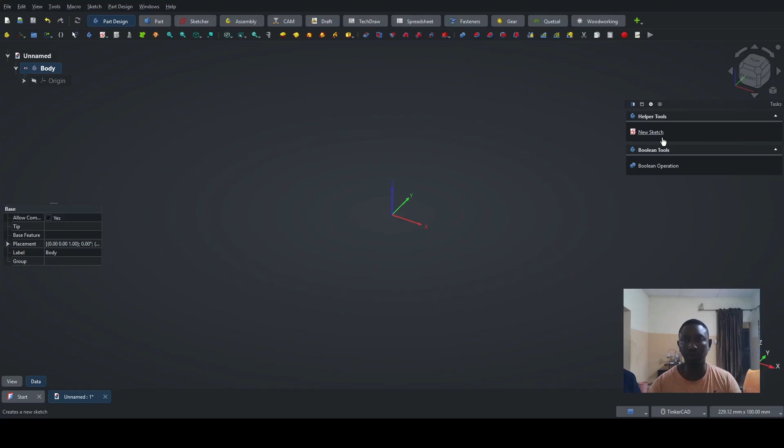So you create your sketch. We are going to use the XY plane, and then draw our basic rectangle. This time around, let's go to the rectangle tool, use your centered rectangle, click on that, come to the origin. Let's put in our basic dimensions, which we can always adjust later on.

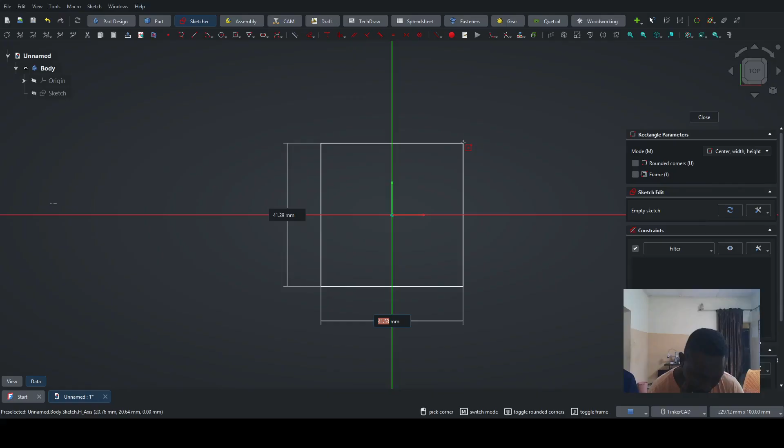But I think let's do it this way. Let's first of all draw the basic rectangle and leave it like that. We'll put dimensions later on.

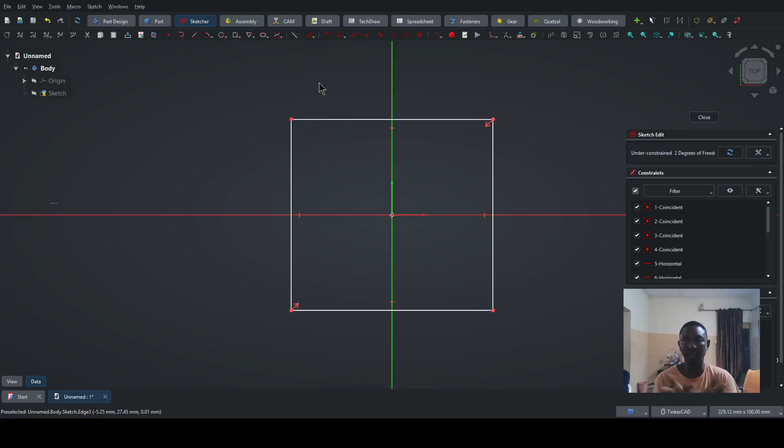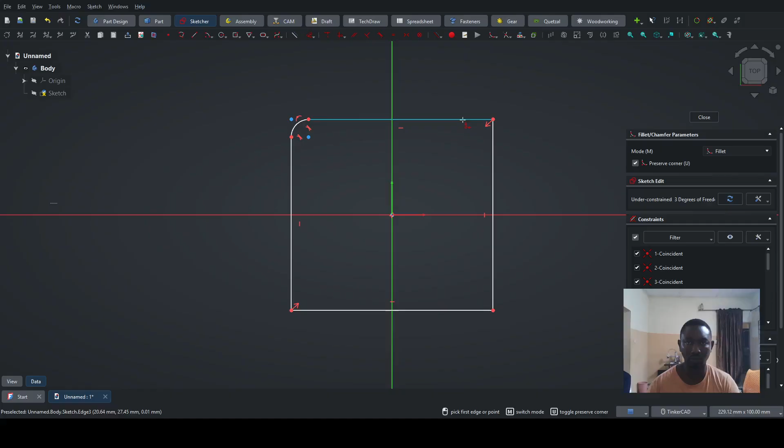Now I want to teach you how to form curves, fillets, or arcs around your basic drawing. So I can select this line and go and do this. You see, this is called the sketch fillet tool. So if I click on this, I can do this, and do this, I can do this.

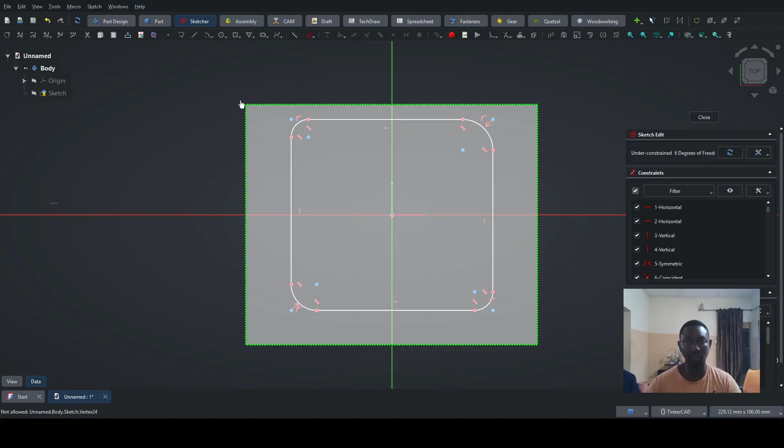But someone who is perceptive would already know there seems to be an easier way to go about this, which is to use what? So I can select everything like this and press delete, and then come to the rectangle tool and click on rounded rectangle, and then draw my rectangle. You see, it's already rounded from the beginning.

So I've created a rounded rectangle. I can just say I want this and this to be symmetric across this. Let's keep that for now until we dimension them. So I've used the rounded rectangle tool.

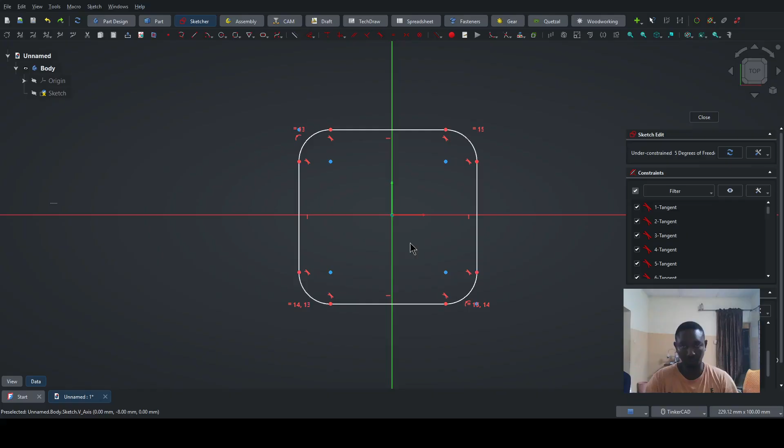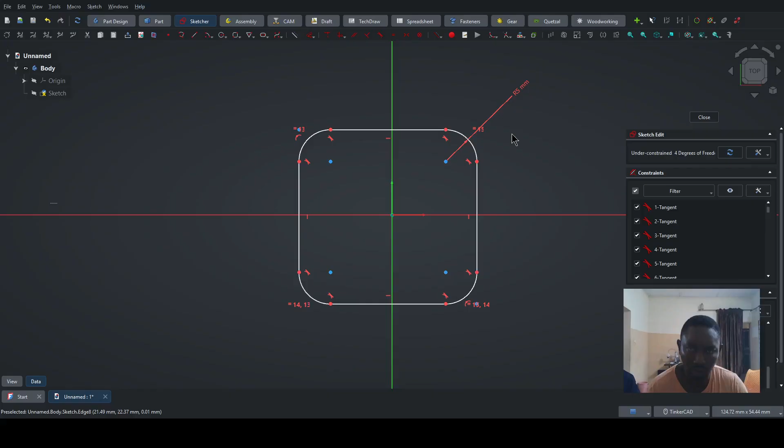5. So since they are all equal, we can just take one of it, press letter D, and press 5, so we'll make the radius 5. Also, we can now dimension between this point and this point and press dimension D.

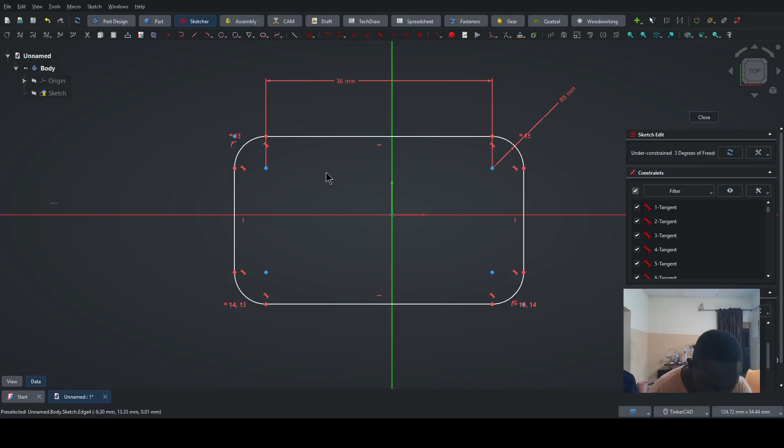In the drawing, it says it is what? 36. And I believe this is a square, so this and this should be what? If this is a square or a square-ish shape, then this line and this line ought to be equal.

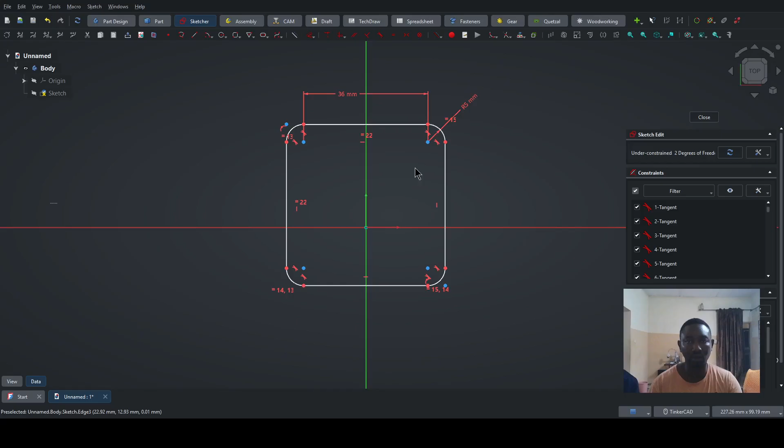I press letter E, and then they are equal. And then we want this diagram to be in the middle of the sketch axis here. So I can select this, select this, select this line, select this, and press letter S.

This is not doing what I want, so let's just do the traditional ones. Let's select this point, let's select this point, and let's select this line, and make it symmetric. And then let's select this point, select this line, and select this point, and make it symmetric.

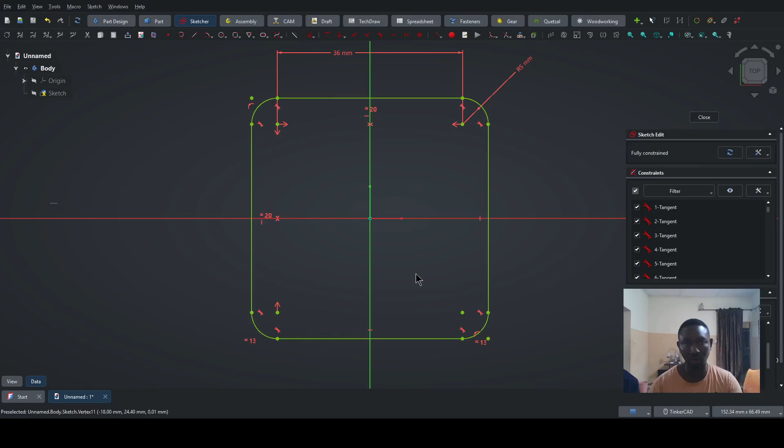So you can see that's symmetric already. FreeCAD can be funny sometimes. So we have our basic drawing, the shell. Let's go on to draw other parts of it.

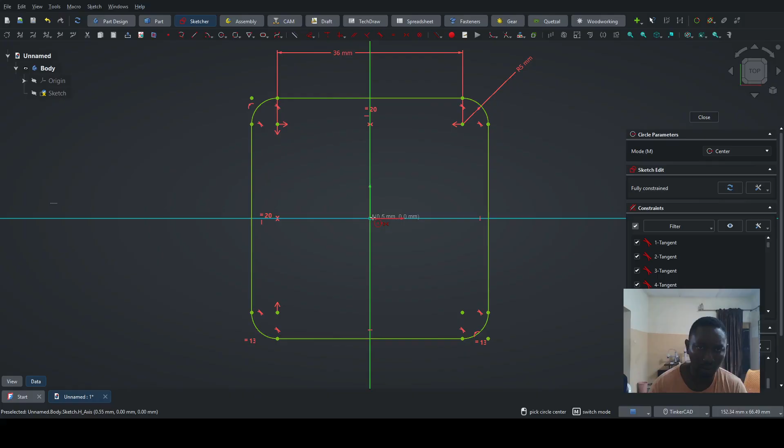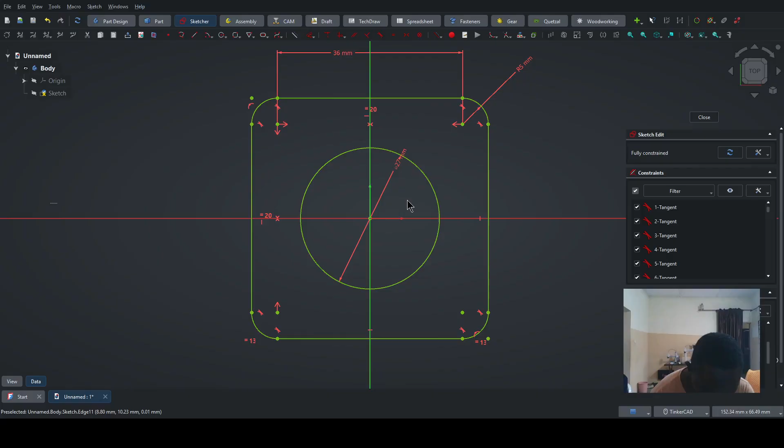And then we have these small ones at the edges, which are 6 each. So I click on this, come here, this dot, and give it a dimension. The dimension is 6, you see?

So I can do an arc, I can decide to just go and start drawing the circles on each of these edges, do you understand? Or I can click on the circle, click on this line, and go to the symmetry tool, which should be called the mirror tool. So on some versions it's called the symmetry tool, but it's the mirror tool now in the newer versions.

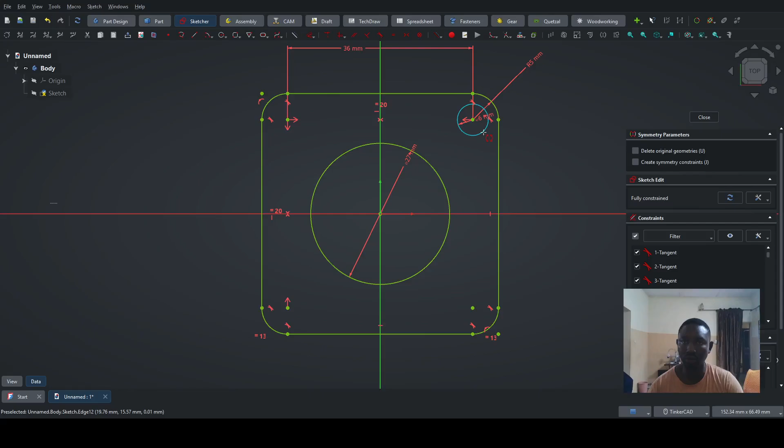So I click on this, click on mirror tool, and I mirror it across this. The only problem is, you see, it is not green because it's not totally coincident. So I can just click on this and this and make it coincident.

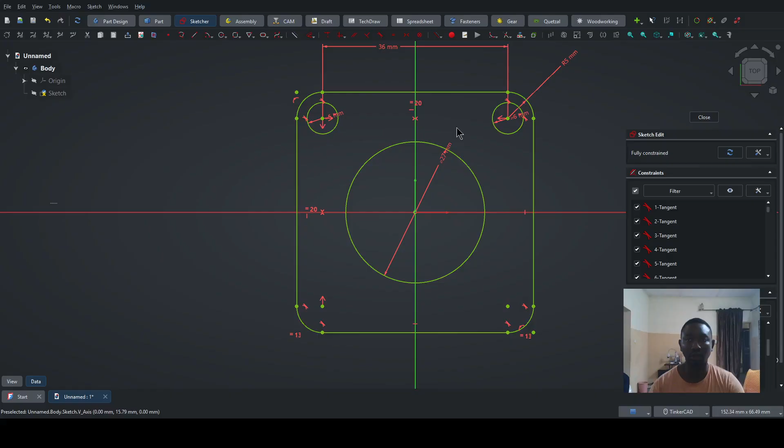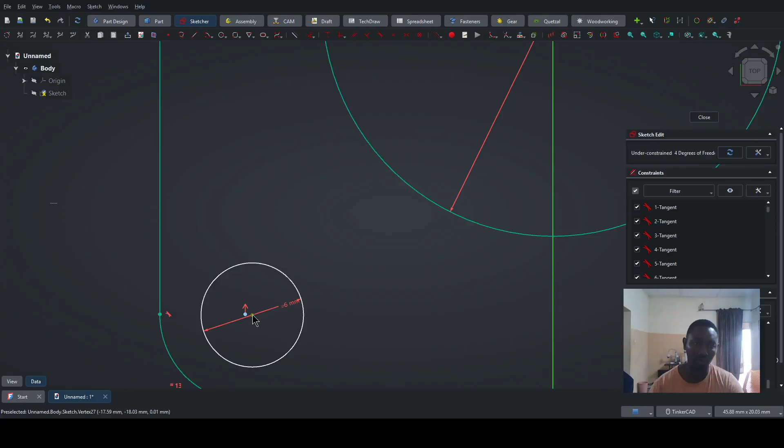I can also select the same thing again, select this and this, and select the mirror tool, and mirror across this line. So the only thing is I need to go and make them coincident again. So this, I don't know, this.

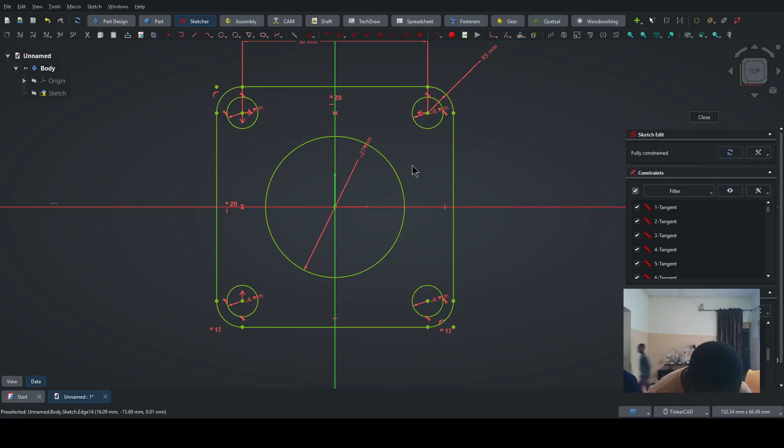So you have this and this coincident. So you see everything is already 6 millimeters. If you like, you can select all of them and make them equal, and then dimension them. Like I said, there are many ways to go about this. And then we have these little dots surrounding the big 27 millimeter circle.

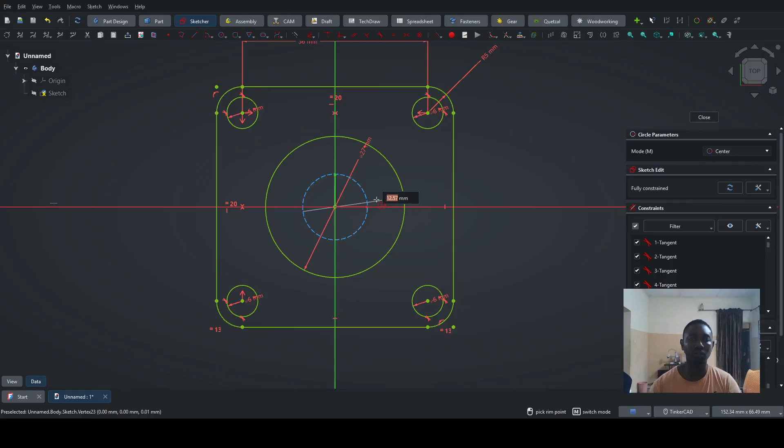So for that, we are going to use construction geometry. I'm going to click on this, change it to construction geometry. I'm going to draw a circle. I will make this the origin, and draw it a little bit around here.

It is said that the distance for that should be, let me see, it's not specified here. Is it 2? Not specified. So I will make this—the other one is 27. Let's make this 32, let's make this 32. So you see there's a line there.

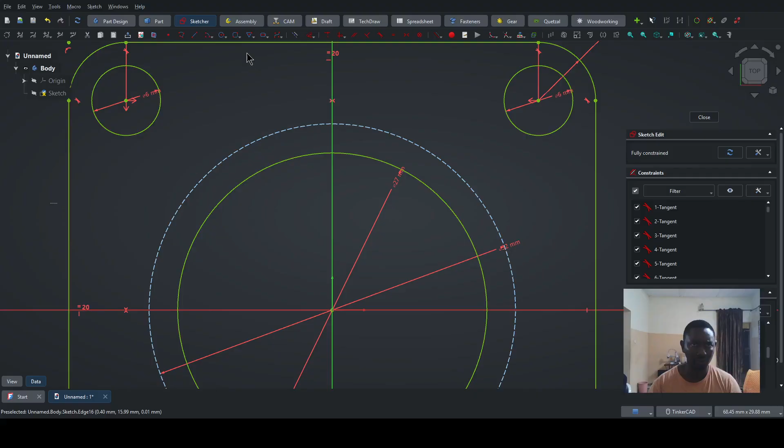So what I'm going to do now is select, go back to this. So we already have a good drawing here. Let's go through another way of going about it. So let's just delete this, let's delete this. So we have this already. Let's close the sketch.

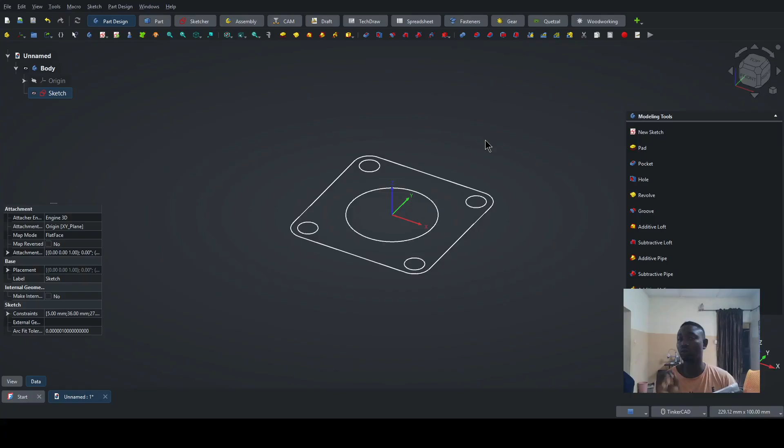And then in the diagram, it says the gasket is 2 millimeters thick. So what do we do? We pad it. We pad the sketch. Let's call it, let's name it base profile.

We did not name the body itself. Let's fix that with Control S and give it a name. Let's call it diagram 3.

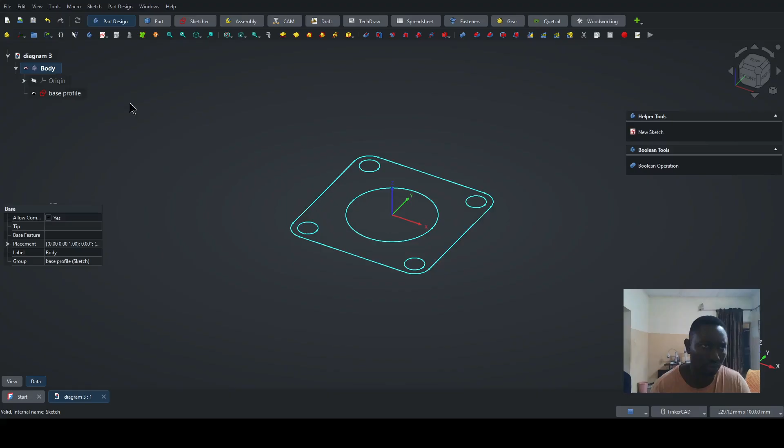Click on this sketch and pad it to 2 millimeters. So we already have that. Now what we should do is click on this face and create a new sketch.

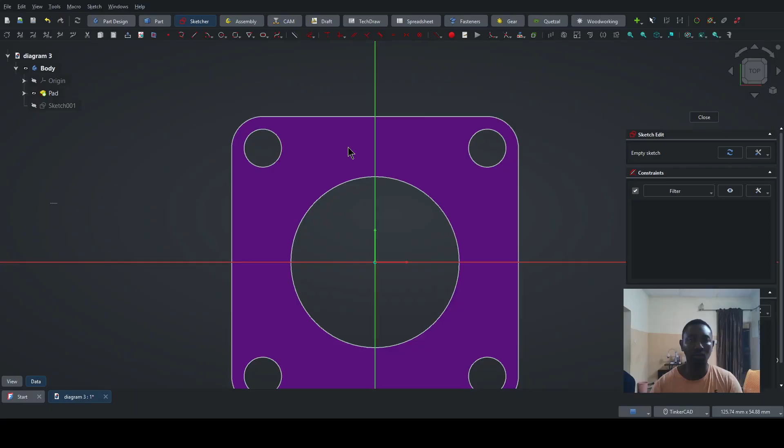What I want us to do now is go to the circle tool. Since we were not given a dimension of how far apart the circles are, we can use our own discretion. Click on the circle tool and then click on this line here.

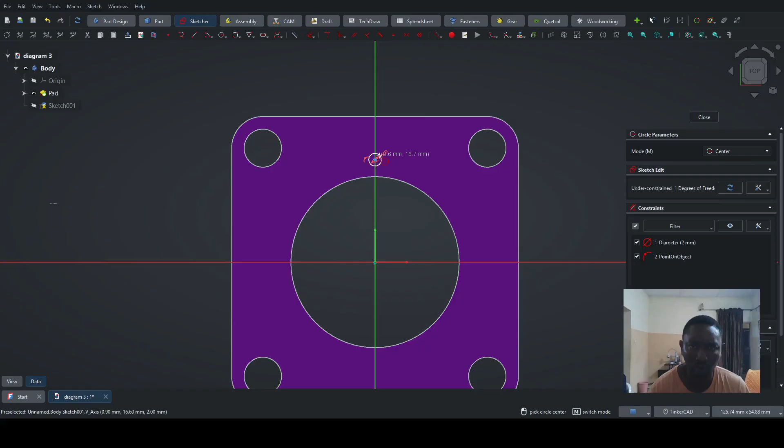But we're given the dimension of the circle, which is 2. So if you look at it, I've made this circle coincident with this line. It can move up and down, but only along this line. So I'll put it at a comfortable distance, something like this.

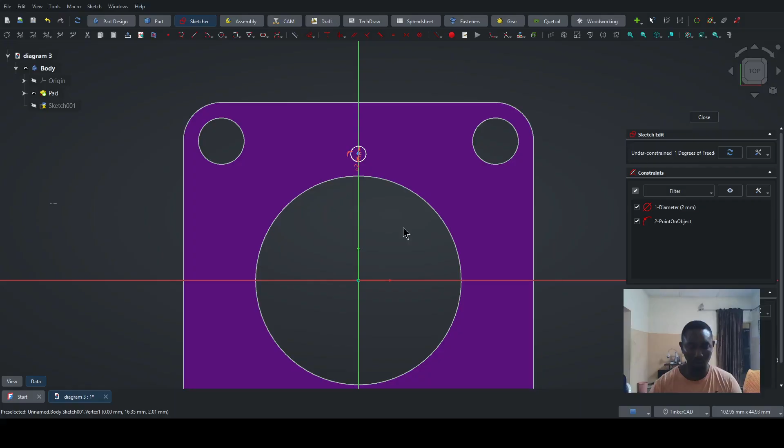So it's a circle. What do I do? I close it. Let's rename it. I'll call it hole 1.

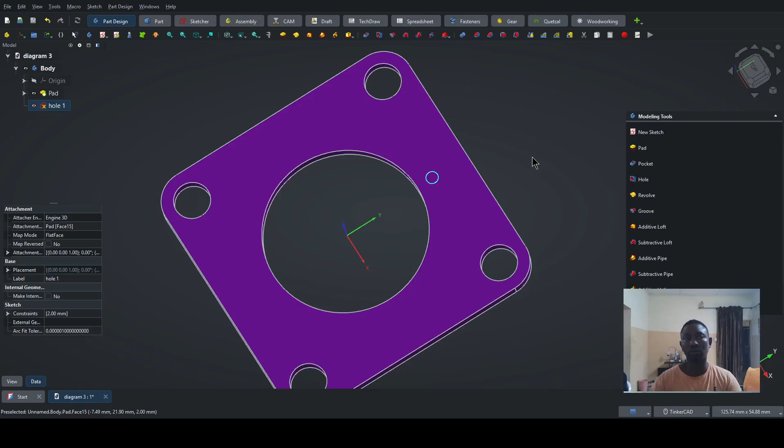So I have hole 1, and what should I do with that sketch? I pocket it - pocket it through all, so I have a hole. That's it there, so I can take this pocket.

I select this pocket and use one advanced tool. Come here, you see these tools: one is called Mirror, one is called Linear Pattern, one is called Polar Pattern, and one is called Multi-transform.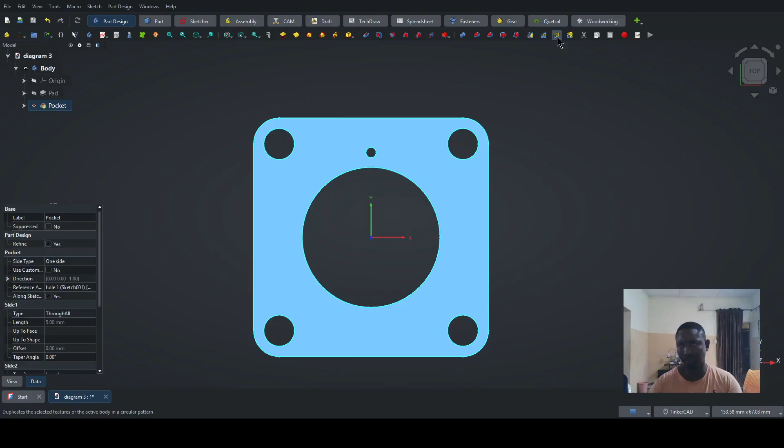Good, so now you see we are back in Part Design - we are out of Sketcher. I'll select this pocket now and then select Polar Pattern. Now you see there's a menu open on the left side. It's going to ask you some questions.

Each occurrence - how many holes do I want? Now look at the diagram and count: how many holes? 1, 2, 3, 4, 5, 6, 7, 8 holes. I type 8. You see the holes, they are evenly distributed.

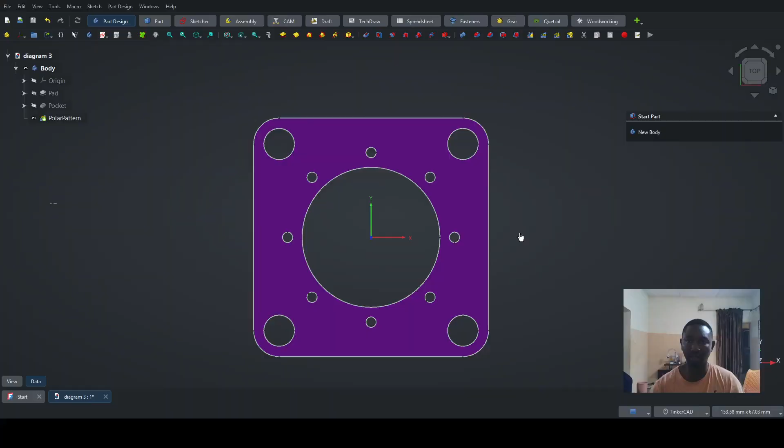And what is the angle I want it mapped across? 360, definitely 360. So I click OK. What do I have? I have a full diagram in beautiful purple. So this is how to complete this one.

I think it's relatively simple, and given the time frame, we still have some time, so I'll use it to explain some basic tools or things that can give you issues.

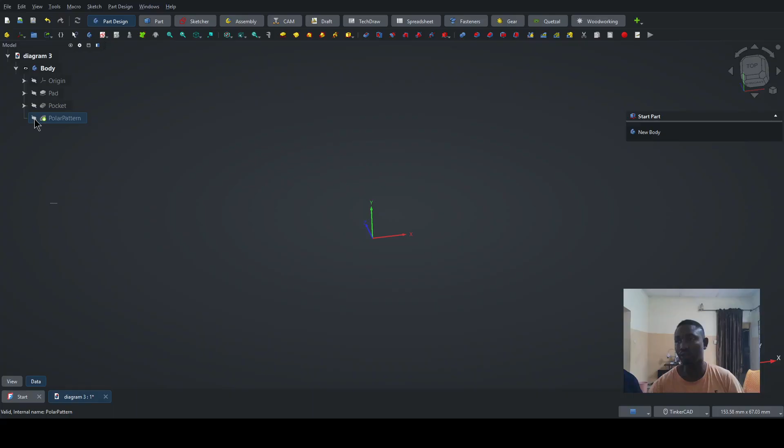For example, it's possible you mistakenly click on this and everything goes away, or you need to come back and click on this again. You may mistakenly click on this and discover all your holes are not showing - it's because you've selected something at the upper part of your drawing. So we are clicking on the pad here, then come back and select the latest thing you did.

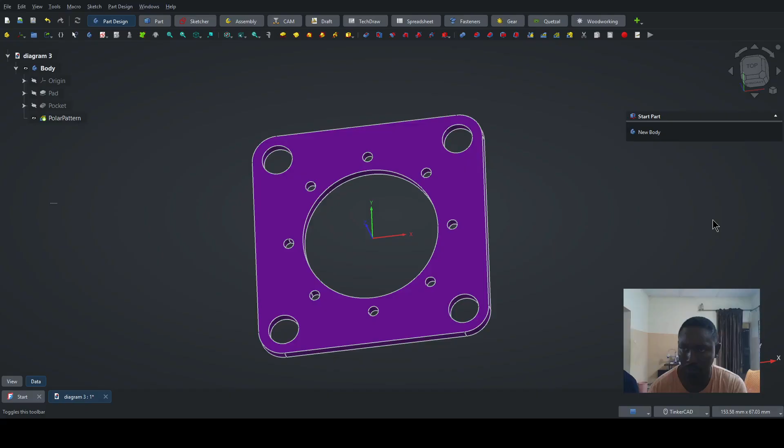You see that's there. Another thing is you may not like the arrangement of these tools. This one I've arranged the way I like it. You can look for an empty spot, right click, and you see 'lock toolbar.' My toolbar is locked so nothing moves about.

If you select it, it will unlock the toolbar, and now I can move these things around to where I want them to be. Once I'm done, I can lock it back. Or if I click on it, you see very many options here.

Some of it you don't need. So in case you can't find some of your icons, it's because you've already removed them, and some of you would have removed this part. This is also how you bring it back - if you remove this part or that part, this is how you bring it back.

You see, you click on Model, you see. So if you click on Model, it takes it away, and on your own, this is how you bring it back and stuff like that.

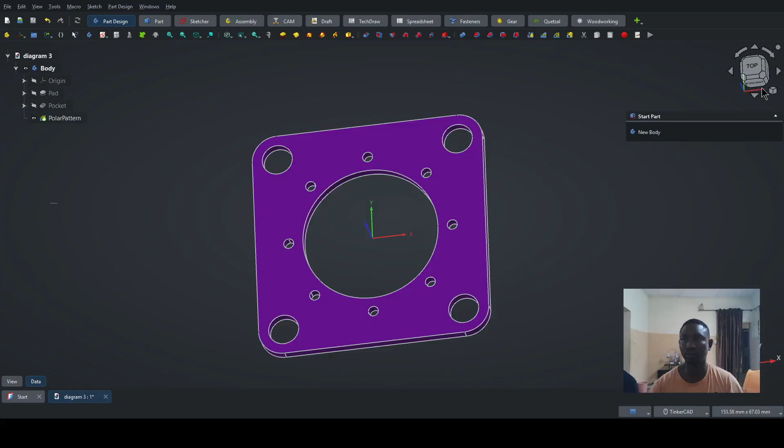Let's continue. You also see there's a navigation cube here - this helps you go to top and rotate to different parts of your drawing. There are also shorter ways of doing this. You can use the number pad: if I press 0, it goes to isometric view; if I press 1, it goes to front, 2 is top, 3. I'm pressing the number keys.

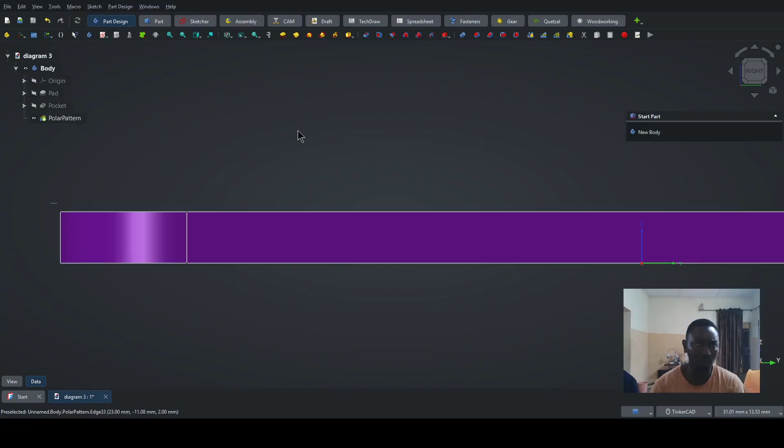Or you can come here - in case you zoom and don't know where you are anymore, just click on this and it fits the drawing back. Do you get that? And then you can change your view here too. So I want isometric, which is 0.

Also, if you are using a mouse, I advise you to come down here and click on this and choose Tinkercad as your navigation option. Or if you are using the touchpad, it may be beneficial to use this option, but I would prefer you use Tinkercad because that's what I use.

In case you start using - there are different ones here from different types of CAD drawings. If you have CAD drawing experience, you can find one that best suits what you're used to. But if you are new, just use Tinkercad - it's easier to use and intuitive.

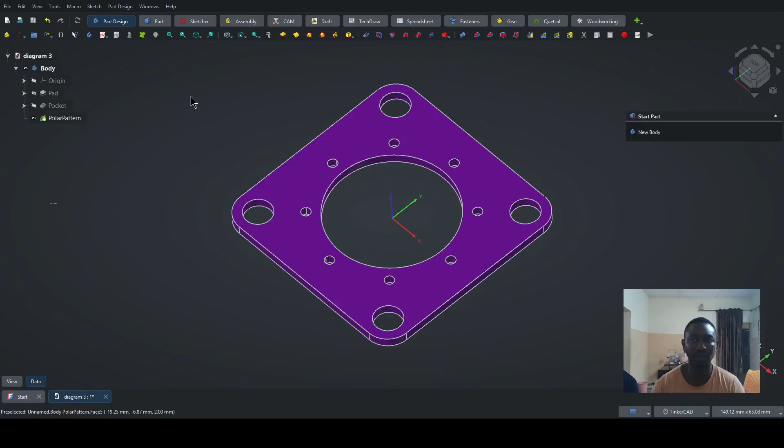So I think with that, I can stop this recording, not to make it too long. And if you don't practice, there's no way for you to learn this thing. You understand?